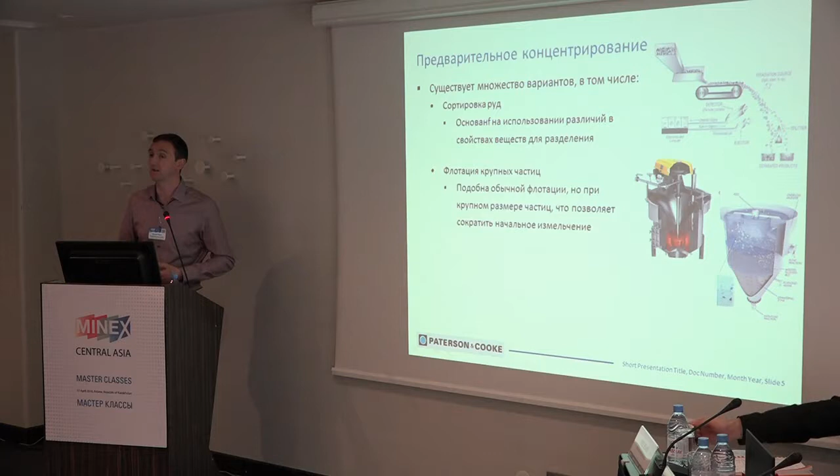This is a particularly interesting technology because we can actually do this underground. So what we can do is separate out a coarse flotation waste underground, which can be placed back into the voids underground and never needs to come to surface. There's a number of companies looking at that technology. So we're only bringing to surface what it is that we actually want.

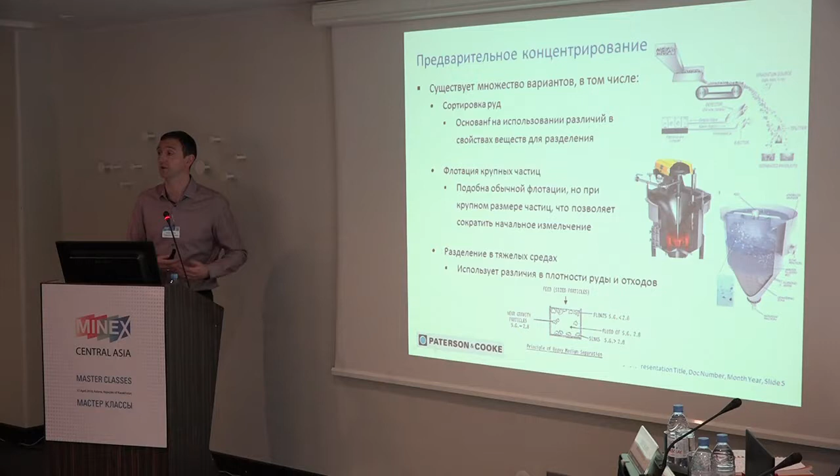And then finally, this one's been around a lot longer, but heavy media separation. Again, using the density difference between waste and ore to actually isolate what we want. I think that's a more known technology, but again, you'll start to see it not purely from a processing perspective once everything's in the process plant, but as a pre-concentration. So how do we isolate those ore streams or those material streams before they get into the process plant?

The next aspect is getting more from ore. It's a common phrase I've seen a number of different companies use, but once we've got it in the process plant, how do we maximise what we want from it? We've all seen stories of people going over old tailings dumps because there's mineral left in there. Well, how do we go about making sure we get that first time round? That gives us the ability that for the same number of tonnes through the front door of the process plant, we're putting less in the tailings dam, and we're recovering more value from what we're doing, which we should all be interested in from an operations perspective.

Again, there's a really wide, next slide up, there's a really wide variety of different technologies out there. A few that I've struck on, again for the purpose of giving you some illustration.

Particle liberation. There's been a lot of work in recent years looking at how we actually break particles. So traditionally we crush it, we grind it, and it goes through a float circuit or a CIL circuit. If we can actually be smarter about the fracture mode when we're actually breaking particles, we can actually improve the liberation of the particles.

So a good example is high pressure grinding rolls, where we're looking at breaking particles along natural fracture planes, which increase areas of the ore surface that we're looking for, which improves our ore recovery. And it also means that we're not necessarily having to crush and grind it as fine to achieve the same liberation and therefore the same recoveries.

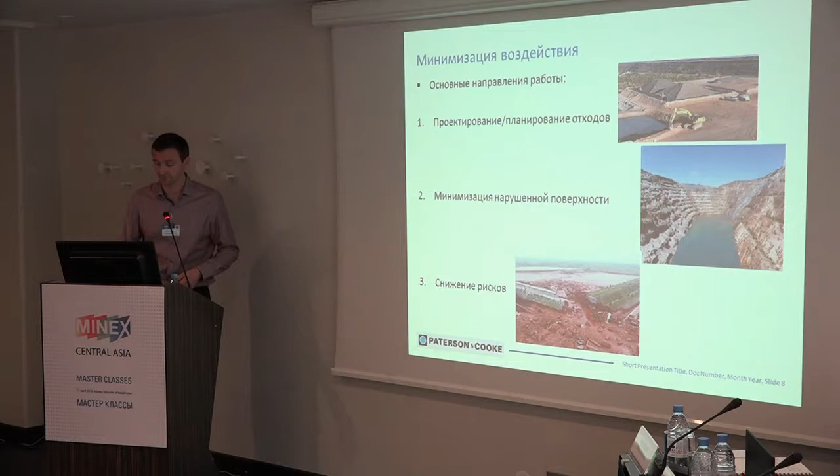The next one is minimizing surface disturbance or impact. So if we've got to put it on surface, what do we do with it that makes it least harmful, the least impact? And then finally, how do we reduce the risk? Now I know Chris is going to talk about all of this as well. I'm not going to dwell on it too much in terms of the geotechnical risk. What I'm going to focus on is some of the engineering, the processing of tailings and mine waste prior to it going in the tailings dam. So we're looking at tailings dewatering, that sort of thing. Okay, so engineering of our waste.

Let's try and consider waste as a product, not something that's left over after we've done everything else we want, because that's typically what it is now. As someone who works with tailings and mine backfill systems, we have the onerous task of the fact that no one really cares what they give us. It's whatever they've got left, and there's no control over it. No one actually measures the particle size of the tailings on a regular basis to make sure it's within the specification.

But actually, particle size or mineralogy can have a huge impact on what we do and how we manage it. So if we think about dry stack tailings, which has been mentioned already, the cost difference you can achieve by having a coarser tailings versus a very fine tailings, if you're trying to filter that material, is absolutely staggering. We're talking tens of millions of dollars. Perhaps you could offset a small component of your recovery in lieu of trying to produce a more manageable tailings product. So we need to start doing cost-benefit analysis of what's more valuable, the cost of disposal of our tailings or the small amount of additional recovery we might get.

And I appreciate that I'm talking, if you like, from both sides of the fence. On one side I'm trying to say that we should recover everything we can, and on the other side I'm saying perhaps we need to be more selective about what we recover so we produce a waste that's more manageable. And it is a balance, and it is a challenge, but we have to think about it more, to coin a horrible phrase, holistically. We need to think about the whole process, not just one particular component, and break down silos within our organisations to actually look at different aspects of that. An example of where people are trying to engineer waste, there's a cooperation between Goldcorp and FLSmidth.

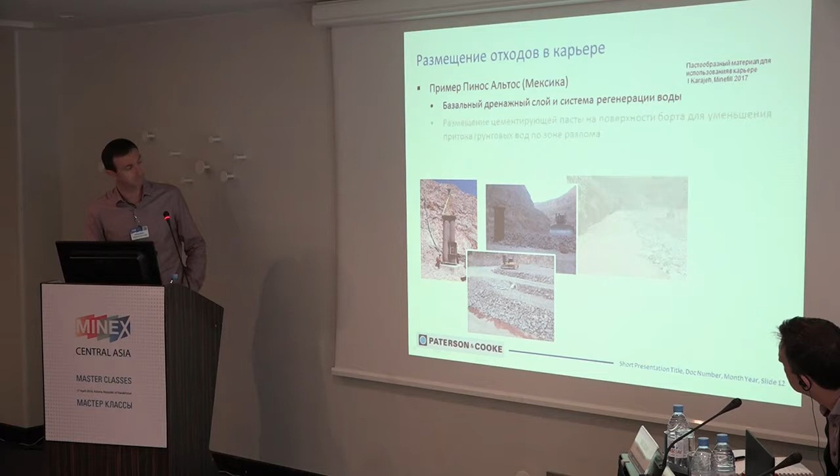So you can just see that here. This is effectively a barrier layer of paste fill that, as the fill increased inside the facility, they brought up the side with it. So what they were doing was effectively putting a low permeability barrier against that wall.

And then inside that, on the right hand side here, they used the filter cake from the filters at the backfill plant, or the filter plant, because it had a dual purpose, to place the material within that void resource. And again, what I'm trying to demonstrate here is that there are opportunities to utilize infrastructure that we might have for one purpose to springboard into another purpose. And that's been a very successful solution.

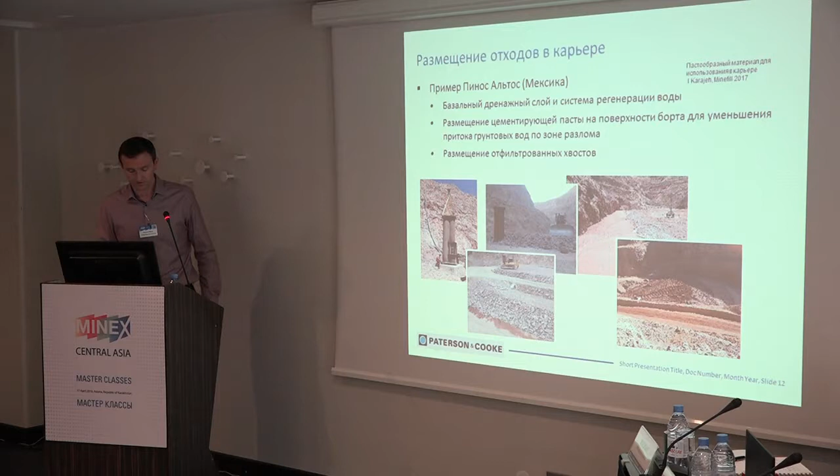Next aspect to talk about is mine backfill. This is something that's close to my heart and what I spend a lot of my time doing. But again, it has a dual purpose. We often look at mine backfill from the purpose of increasing our mineral resource, because it allows us to mine more material underground. But from an environmental, a waste management, and a sustainability perspective, it gives us the opportunity to put a lot of that waste material back underground.

Now, the natural swell factors we see typically restrict us to only getting about 60% of what we mine back underground if we're processing all of the ore that's extracted. If we can go down that pre-concentration route that I spoke of at the beginning, we can actually start to move that balance. And we are looking at scenarios where we're putting all that material, all the tailings, back underground, and thereby eliminating the need for a tailings dam, which often is one of the most challenging aspects of any environmental permit to obtain.

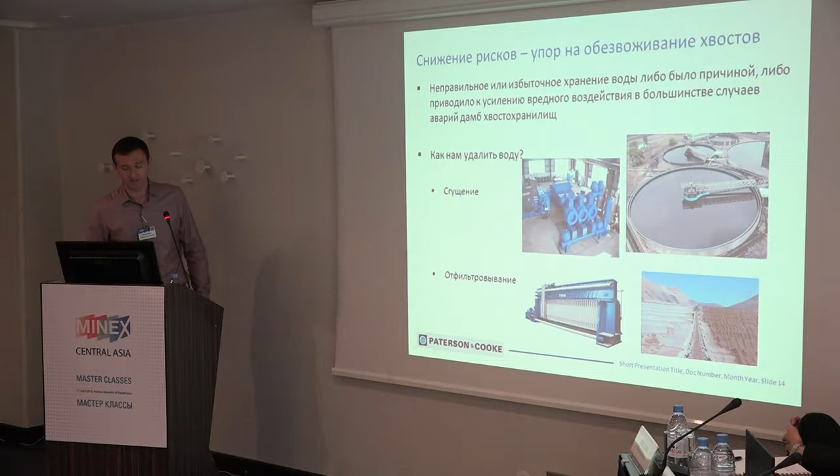And I'm going to talk about two aspects. One is thickening and one is filtering. Neither are new, but I'll give you my perspective on those and where I think they're going to go. So tailings thickening. It's not new. Patented first by John Dorr over 100 years ago. And what we're ostensibly using is gravity.

You're familiar with some of these terminologies: conventional, high rate, high density, paste, and then there are actually other rakeless units out there which can have application. Ostensibly, this is a simplistic view, but as you get thicker, the size and shape of those thickeners changes. So we can go conventional, where this is a very traditional unit, potentially no flocculation, potentially no feed wells, and so very little optimization. We're just providing a large area which is still and allows the solids to settle down with the water overflowing at the top.

Moving on, we look at high rate thickening, where we're introducing flocculant. We're putting feed wells in the centre to engineer the mixing of the flocculants with the particles to improve the settling rates, to coagulate or flocculate those particles so they settle faster, and we can reduce the size of it. So, as an example, Chris, with you, I worked on a project where we looked at an operation which was operating 13, 50 metre diameter conventional thickeners, and we were able to replace all those units with a single 100 metre high rate unit, purely because of the optimization of the flocculation in the feed well. So we can be smarter about it.

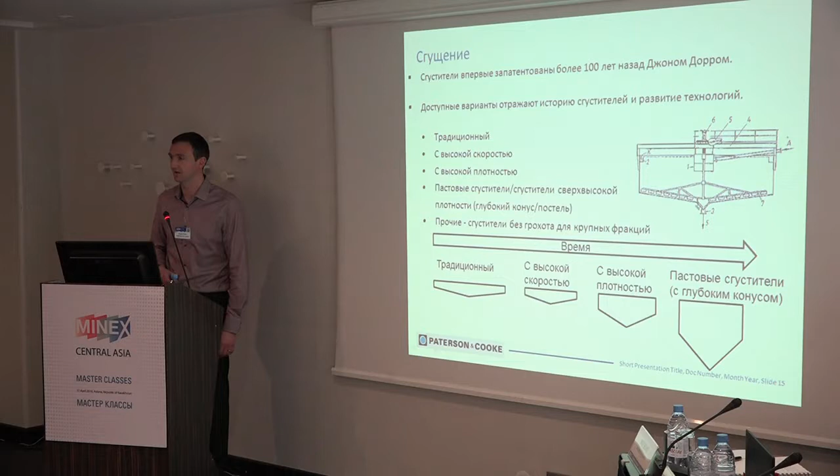We then start moving over to the higher density and the paste thickening end, where we're starting to build up the sidewall heights you can see here. So in addition to purely gravity settlement, we're now seeing consolidation helping to improve the underflow density and push more of the water out. And you can see that follows this transition of getting thicker. And there's also a progression of time. So this is where we started, and this to an extent is where we are now, although there is still an application for high rate thickening. I'm not an advocate of everything must be paste thickening. I'll talk about an example of that in a minute.

Key aspects of thickening: it is gravity induced. There's nothing we can do about that. Gravity is usually pretty constant, but we can use flocculants to aid settlement, so we can coagulate those materials and help them settle better, as I've said. The other aspect we can influence is the material we're putting in at the beginning. So particle size is important, mineralogy is important, water chemistry is important. We can actually control all of those things, and again, go back to what I was talking about in terms of engineering of our wastes.

If we actually start looking at this seriously, we can start playing with these in our process to optimize how this performs. And that drives cost savings, because at the moment the biggest inhibitor to people doing the best thing they can for tailings management is cost. We'd all love to do the best possible for tailings management, but tailings is a cost. It always has been, it always will be. But if we can be smarter, we can try and optimize that. And we can control and optimize some of the underflow densities as well. So we can control the flocculant dosing.

I talked earlier about how we can preemptively forecast mineralogy coming into process plants. There's technology out there now which is proactively using that forecast of mineralogy and adapting the flocculant dosing so that we optimize the product. If you think about some of these big thickeners which might have residence times of up to 12 to 24 hours, there's no point reacting after the material comes out the bottom and you've seen its density to then change the flocculant, because that ship passed 12 hours ago. So if we can do it in advance and proactively, we can drive the performance of these units up.

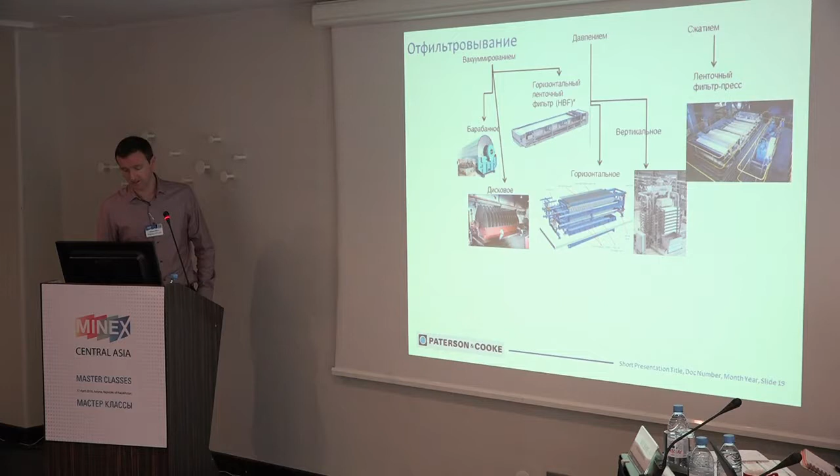Sorry. If we're looking at surface disposal of filters, then we're principally looking at horizontal belt filters or plate and frame, depending on the deposition that we're going with. So this is going to give you a wetter cake, but it's typically a lower cost solution, or can be, not always, than a plate and frame, but the plate and frame gives you the lower moisture content. So it depends what your drivers are as to where you're going.

If we're looking at backfill, then we're still focused on typically vacuum filtration, be that horizontal belts or discs. Tend not to use drums quite so much. But again, when we think about the fact that process plants or comminution circuits are getting finer, producing finer tailings, that's starting to knock some of these vacuum filtration options out. So we're being pushed down the pressure filtration route purely because of the material we're producing.

This is considerably more expensive than these, both in capital and sometimes in operating. So again, going back to what I said previously, there can be a trade-off between what we do in the process plant and the tailings we produce, based on what we subsequently have to do to manage those tailings.

Some of the considerations we're looking at when we're thinking about filtration. So we're looking at what our moisture content needs to be at the end of the process. That depends on how we're transporting it. There's no point putting a fairly wet, high moisture content cake like this in the back of a truck. By the time you've driven it several kilometers, you'll have two products in the truck. One will be water, and one will be a solid segregated cake at the bottom. The water will come out, or has already come out all over the haul road. The cake won't come out the truck. So you need to think about these sort of things.

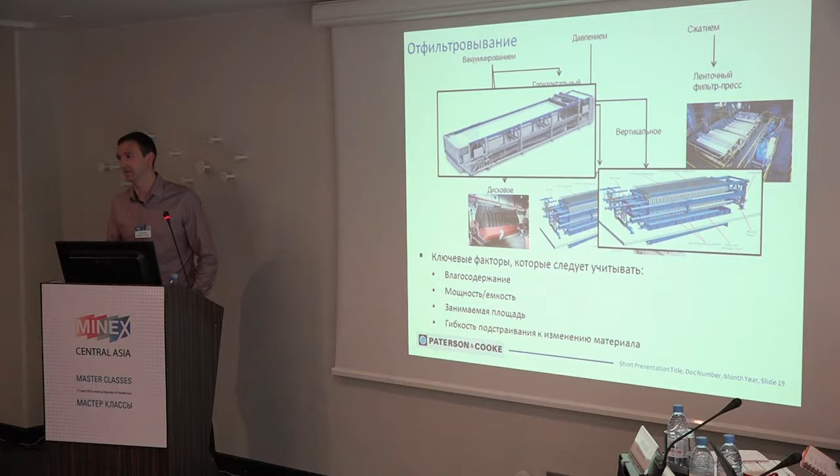And then finally, flexibility to change. No ore stays the same through the whole life of the project. It does change, it does adapt. So which of the systems you design or select is more accommodating of change further down the line? So this is more sensitive to particle size than this, potentially. So again, it's just thinking about these things.

Last couple of slides, just some of my thoughts on filtration. I put this up in a presentation I did before. The question is obviously, is it something we should be doing? We should all be filtering our tailings. That's what we should be doing. It'll avoid the Mount Polleys, it'll avoid the Samarcos, it'll avoid all of that. First of all, we talk about dry disposal. It's not actually dry.

It still has somewhere in the order of 10 to 15% moisture, which is still a fair amount of water, and it can still move, it can still flow. So first of all, it's not dry, it's just not as wet. Cost is still a major obstacle, okay? But we are starting to see that resolved, but not necessarily through engineering.

Regulatory pressure is huge. So you look at BC in Canada, where they had the Mount Polley disaster. There's huge pressure to go with pressure filtration or dry stack tailings. It's the biggest motivator for it from that regulatory perspective. So that's pushing people. We're facing situations where clients are having to do it because they're demonstrating gold standard, not because it's the best solution for their operation from a technical perspective, but because that's what the authorities have demanded and expected, and that's going to increase.

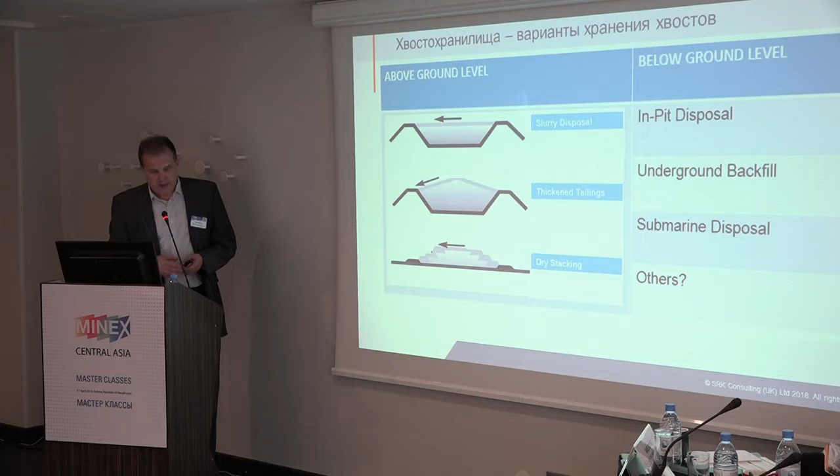Okay, so we talked about upstream construction, downstream construction, the most expensive, and centerline construction. And we talked about valley disposal, which you still have lots of here. Even so, the most popular in Kazakhstan is paddock disposal, where on flat ground you're just building the tailings facility all around, and so on. So it's nothing new.

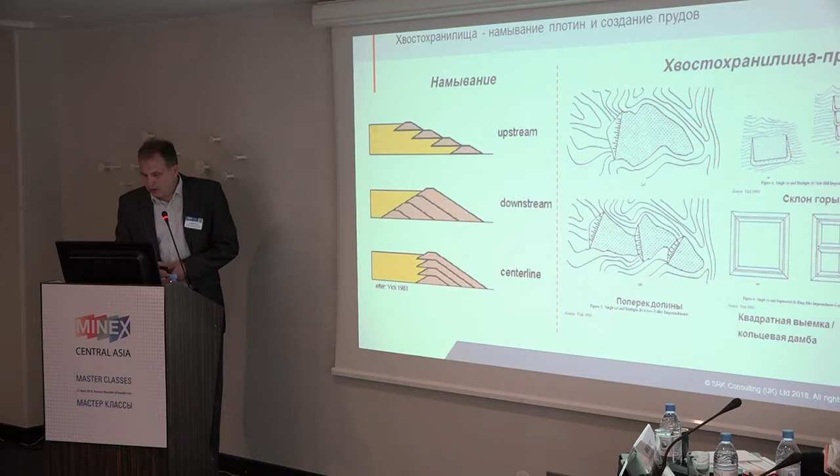I just wanted to show this slide for people who are not involved day to day with tailings. This is basically a mill. We send the slurry here to the tailings facility. This is the containment dam. And this is the clarification pond. And we're disposing the tailings into the facility here. And I just put here the reclaim pump, the floating station.

Most of the time here in Kazakhstan, you have the decant tower, which is basically to take the water from the tailings here. You put a vertical section here, and then you put the pipe through your containment dam here. This is done throughout Russia and Kazakhstan as the most popular method. Just wanted to bring to your attention that, for example, in North America and South America, we would use reclaim pumps because of safety.

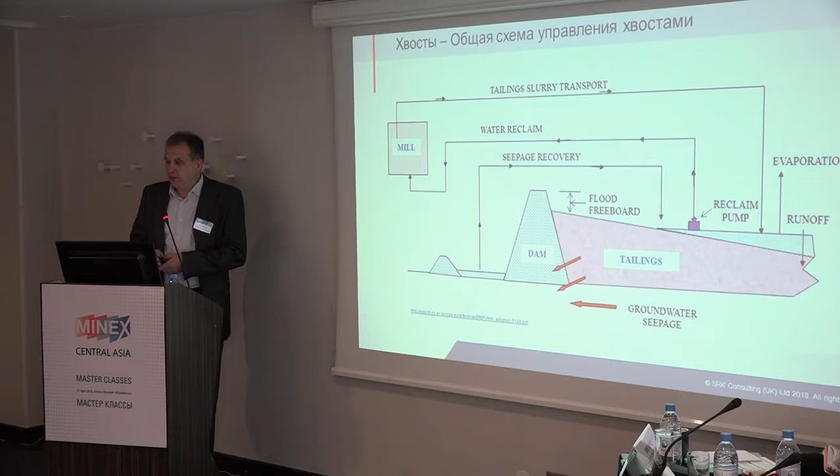Okay. The next thing I'm going to talk about is the recent failures and how you analyze the tailings facility, and the different codes which were already discussed before.

Okay, I'm not sure, are there any designers of a tailings facility here? Like engineers that were designing tailings facilities, in the room? Are there any engineers that are designing tailings facilities?

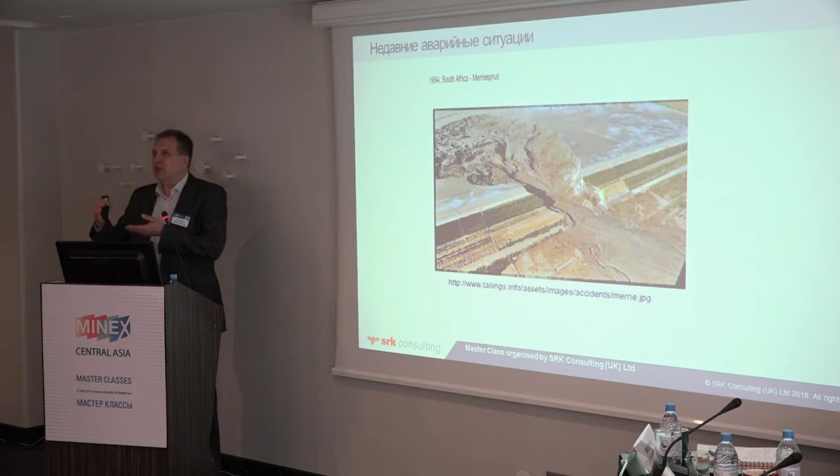And basically, this is the failure that I think about 20 people died during, and it covered the whole village with the tailings and so on. This is one of the first incidents that made people start thinking about static liquefaction. Static liquefaction is really a mode of failure when you have very loose material trying to contract. So very loose material becoming all of a sudden contractive, and the tailings dam becomes basically a fluid. So this is the liquefaction, and this is what had occurred here.

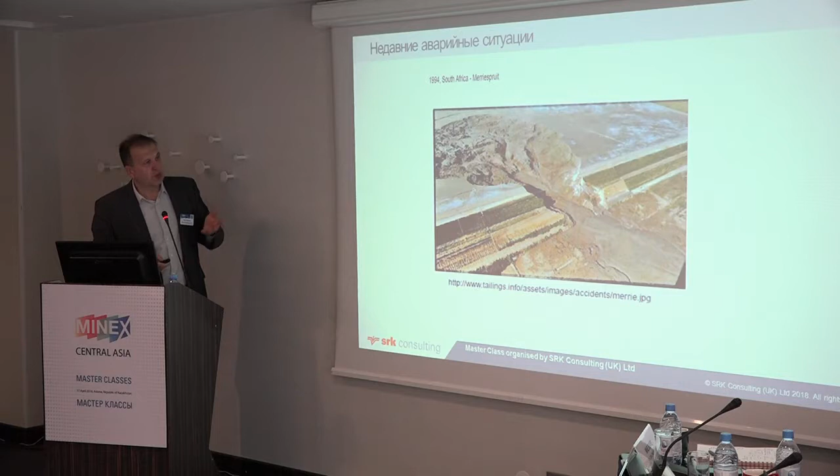Another big one you've all heard of is Mount Polley. Again, why I'm showing those failures is because those were very well-known operators, and they've been designed by very good engineers, and they still couldn't manage it. About 20 million cubic meters of tailings has been released into one of the nicest and cleanest parts of the world. The basic problem here was a very weak clay layer at the bottom that hadn't been tested properly, and this is in Canada. So they had the best operators, best designers, best reviewers, and they still got that problem.

The one that I wanted to focus on a bit was Samarco, a 2015 failure. Again, a very good designer. Vale and BHP are the operators, so they are really cognizant of the best practices, and they had a typical liquefaction failure. This is just a map, pre-failure. Basically, this is a valley type of tailings facility, and they were building here with a nice slope, and then they noticed, better seen on a cross section, that they had a problem with the drainage of the material. So they decided to move the tailings and flatten the slope at the left abutment. But that wasn't enough to prevent the failure.

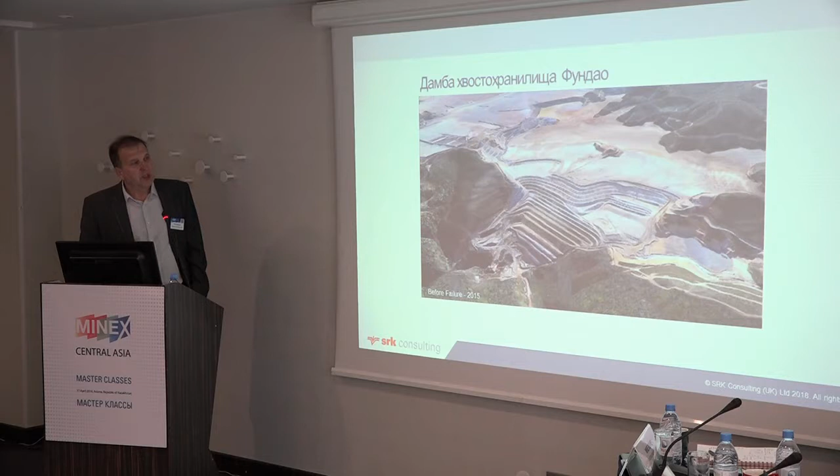So basically, the failure happened in 2015. 19 people died. Then there was a big investigation. That's why we can all talk about it. So this is another example of how you can learn from the old mistakes, before and after. So this is basically talking about how it was.

What I wanted to show, I'm not sure I have enough time. How is that? About 10 minutes still left? Okay, so I'd better move on.

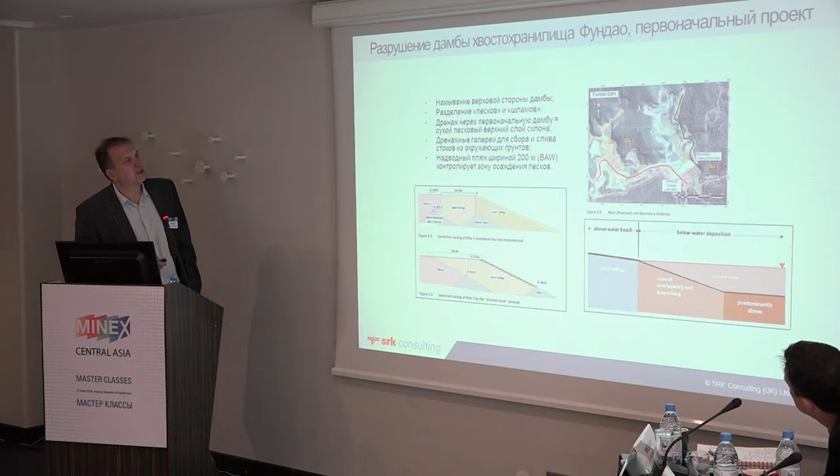To show you the cross section of that tailings dam. It was a well designed dam. It started from a starter dam here, and then they basically deposited sand on it. They used a cyclone, deposited sand here and here, and they had a 200-meter beach, etc. So the other cross section is basically showing a very well built structure. This is sort of intermediate, about a 2012 cross section, where you have the upstream construction, nice sand here.

However, they got some slimes. Slimes are the fine material, fine clay material. And why did they get the slimes? Probably because they had a water line coming really close here. You get those slimes anytime the water comes very close, and you basically deposit your tailings under the water into a low energy environment, and then you get those slimes here.

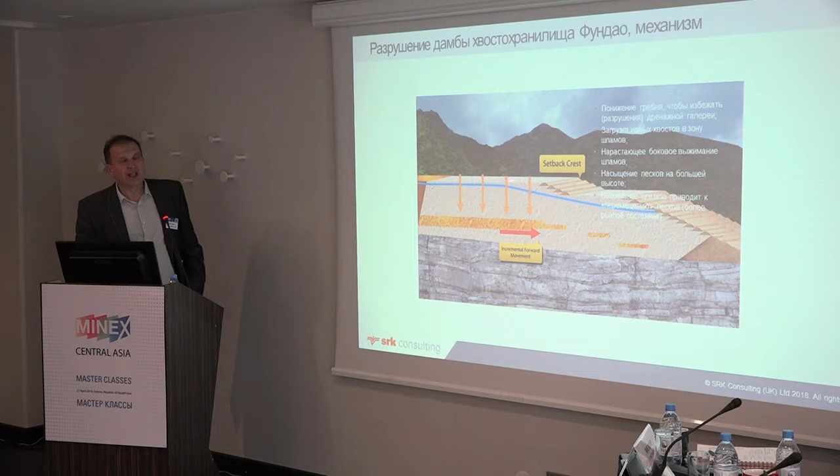In addition, they were getting the failure of the gallery, a seepage gallery. So the water table, instead of going like this, did not want to dissipate, and some of the seepage was coming out on the slope. So in their wisdom, they decided to flatten the slopes, move this a few hundred meters and basically build far away. So this is where liquefaction occurred.

Just a moment. Okay, sorry. I still have 5 minutes. 5 minutes, okay.

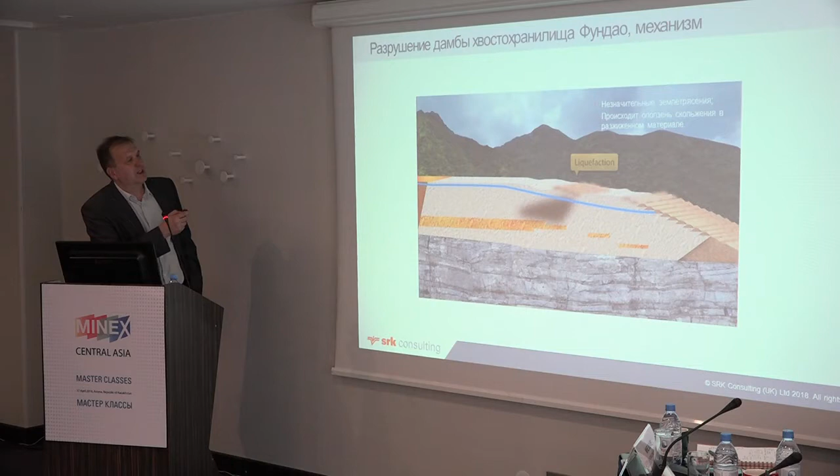So the basic conclusion here: just make sure you don't build on a loose deposit when you're going upstream. Okay.

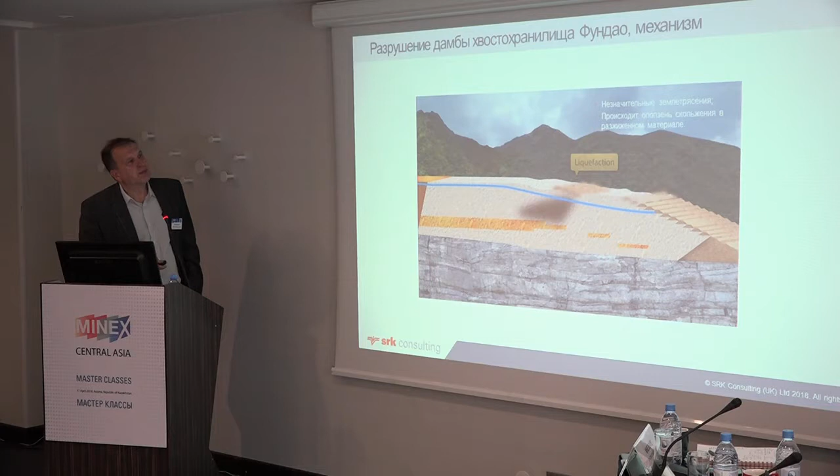Okay, the next slide I wanted to show, which in my opinion is a proper way of designing those structures. First of all, what we do in here, especially in Russia, we design our tailings facility based on effective stress analysis, and we take into consideration only the design for the phreatic surface. Okay.

What we don't do enough here is the consolidation of the tailings. When we're going upstream, we don't consider in our analysis how fast those tailings will consolidate, and very often we step on unconsolidated tailings. But the most important, what I wanted to focus on, is the liquefaction failures, and those occur quite often, even though people don't report them.

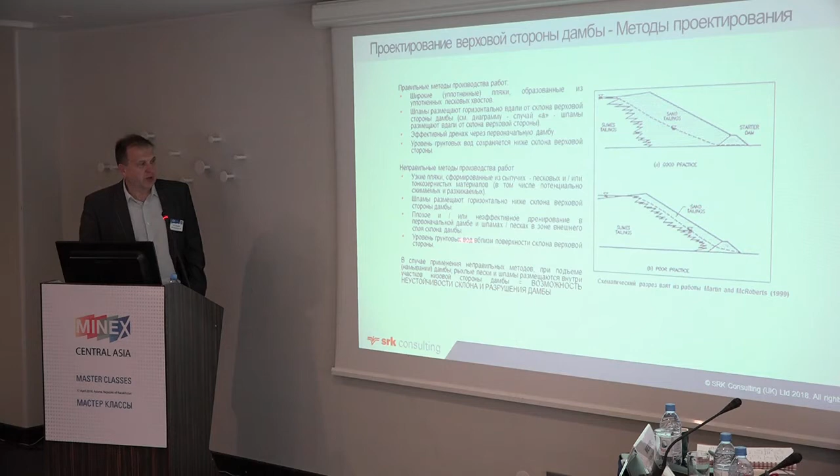And there is a reason for it, because the codes that you're using basically mimic the structural and civil engineering codes, and structural engineering codes go to very low factors of safety. In terms of soils and rock, the strength of material is very uncertain. It's not like steel or concrete. You know that steel is 300 MPa, plus or minus a bit, okay? You know that concrete is 25 MPa, whatever you order.